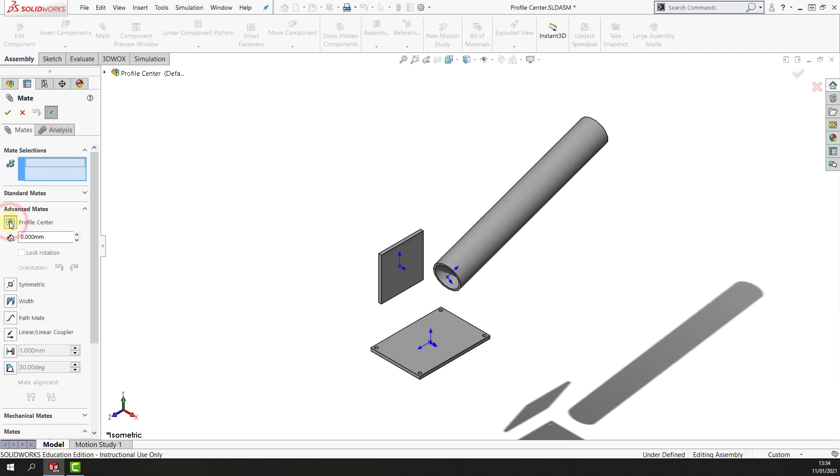and Advanced Mate, and if I select Profile Center, the first thing, if we just pick both of these faces here and line them up, you can flick them around if you want, because that's fixed in, then that's okay. And you could flip the dimension, so we could add in a little dimension in that as well.

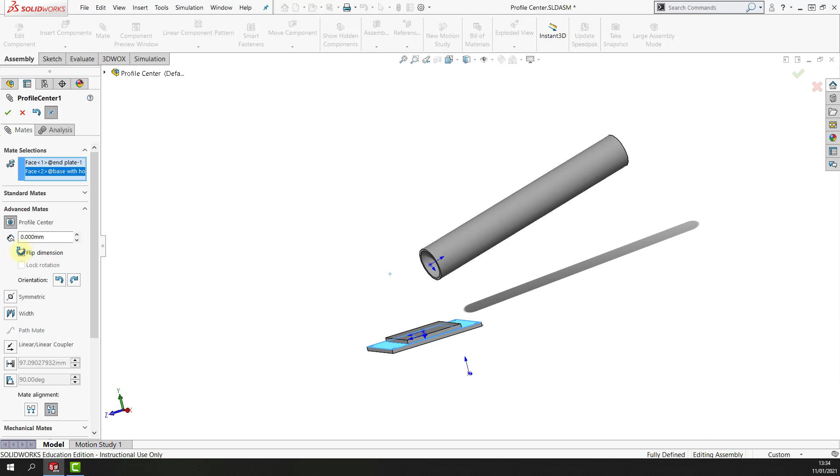Push that away there, so you can see you can add a little dimension if necessary on that. It's not required in this, so change that back to 0, and I'll select and accept that.

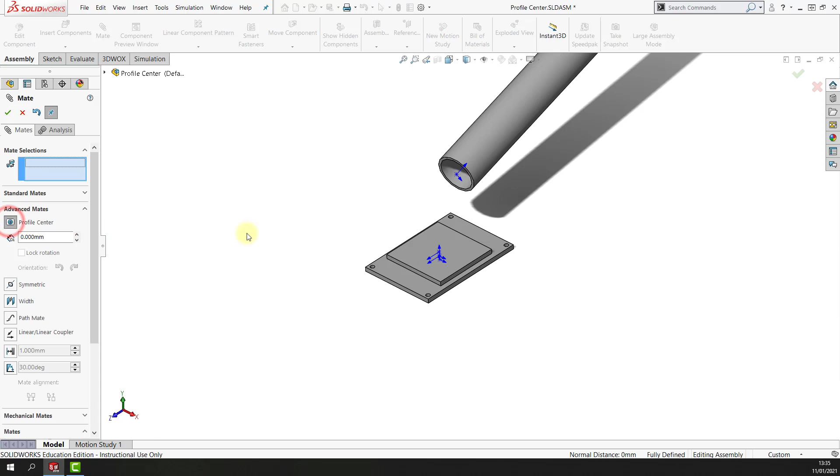Next then, if we again use the Profile Center and select that face and the face of the tubing, this time we're going to lock the rotation to prevent it from flipping around. It's kind of round, so it doesn't have that spin, but we're going to lock the rotation because it will still spin around on that. So click OK on that, and I'll click OK to get out of that.

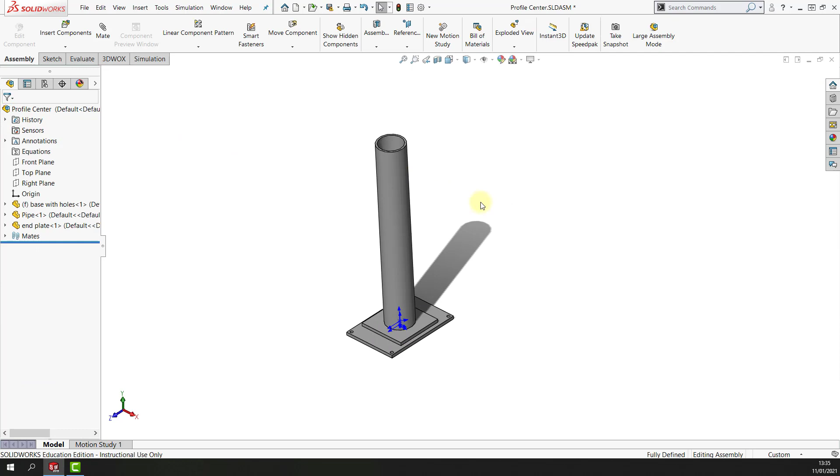And now if we select, hold down Control and create a couple of copies of these parts, we're going to place them on the top. This plate's going to be sort of 90 degrees to the one on the base, so we'll see how to do that in a second.

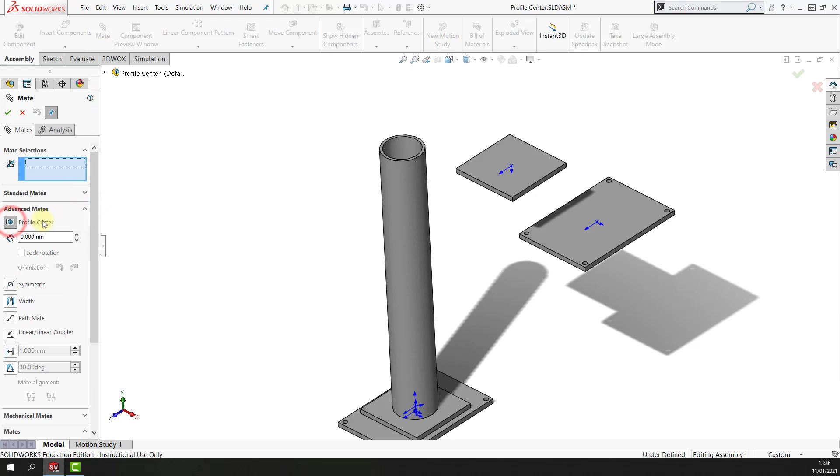So if I pop into Mate, again Advanced Mates, Profile Center, and if I select that face and that face, and click OK on that, and then this time Profile Center, this face, and this face, and this time I'm going to flip that around and select OK and OK on that.

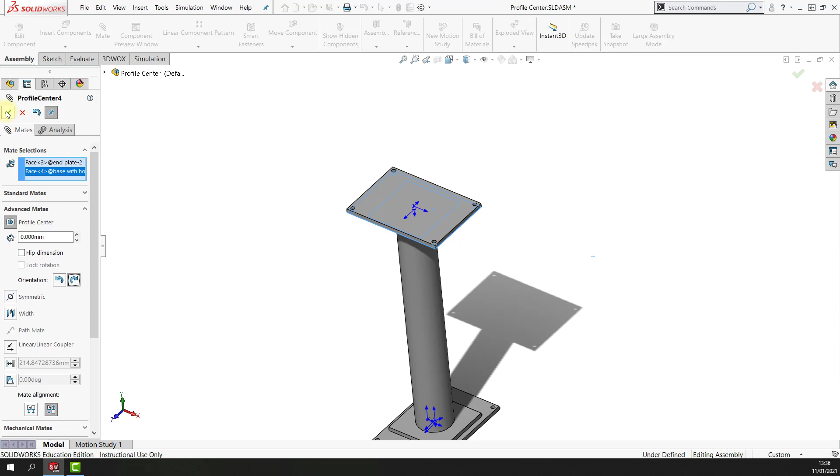Now this one isn't fixed because we didn't fix that with the pipe. So what we're going to do with this is just add a standard mate.

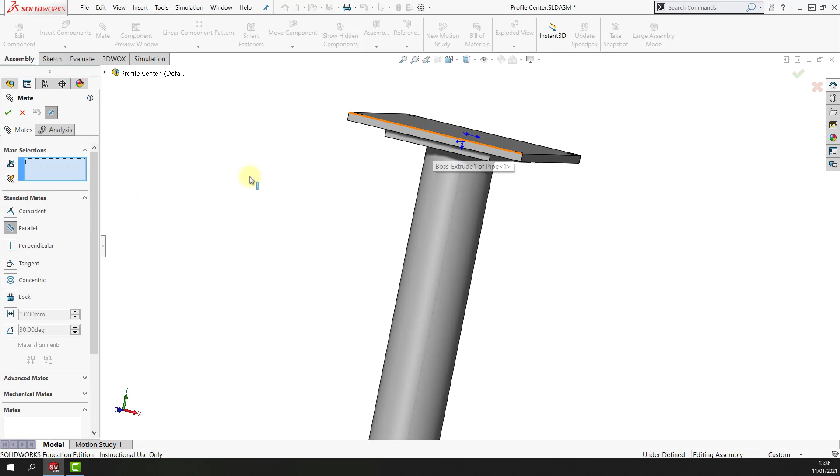So if I just come in here and do a standard sort of parallel mate, just pick one of those faces and one of those faces there, and just make sure parallel is selected and click OK and finish that. And that's fixed in position then. So that's that part complete.